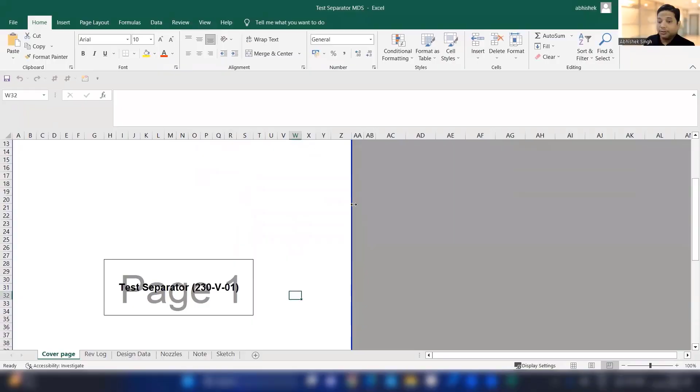So this is the cover page - logo of client, project number, document number, all this will be coming here. One will be logo of client, and consultant means your company. So your company and client. If before project starts we create a template for that project, so you don't need to be worried about creation of the template. Tag number, very, very important.

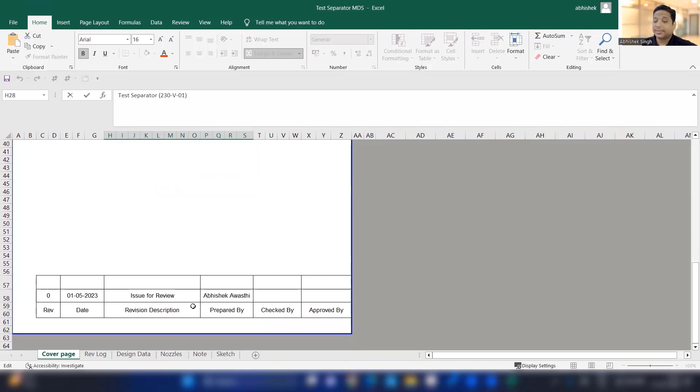With that, the equipment is identified in the P&ID. This is the description, prepared by, checked by, and approved by. No doubt in that.

We maintain the revision logs to make it easier to know what was changed in that revision, basically. If any things are on hold, we write it here so that people using it know that this is still on hold, not finalized. So we'll not take it as face value.

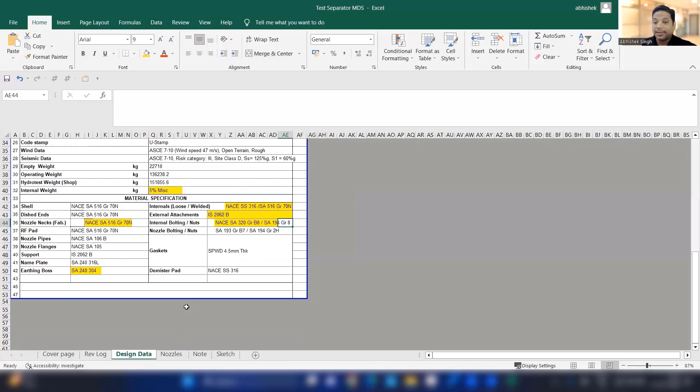Now this is the data from where actually your input starts. This data sheet is applicable for what? Whether it is getting prepared for inquiry, just to get that quotation, or it is for purchase.

If we are in a FEED stage, we may send it only for budgetary inquiry. If we are in detailing stage, we may send it for purchase. Before, they will send the quotation definitely, but if it is finalized stage, they will be using it as complete data.

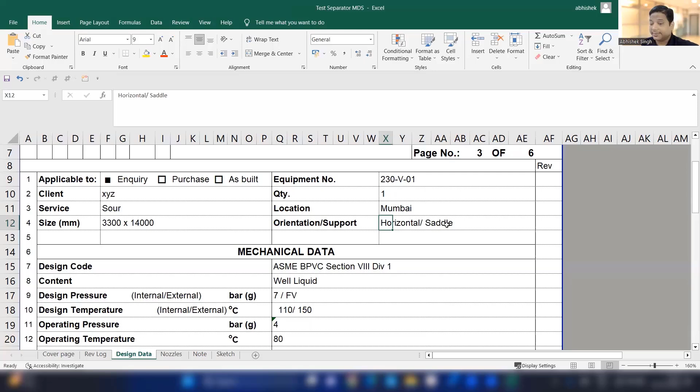Here you'll also get whether it is horizontal. If it's horizontal, then only one option - saddle. If it's vertical, then skirt and leg may be the options. ASME Section 8 Division 1.

These are all the inputs which is there in the process data sheet we have taken. Operating pressure is not that important for us, but anyway we have to fill that. Density - if 3 values are written, you have to also write all 3 by using stroke.

Capacity - we can get that capacity directly in PV Elite. Do you know how to get that capacity in meter cube in PV Elite? Let us say I open a test separator done by one of you.

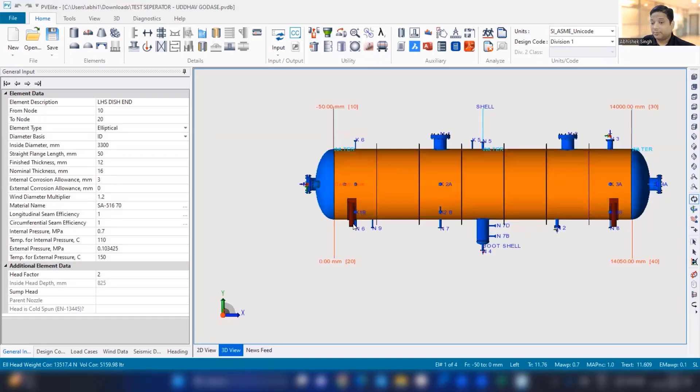Now this is the element for which I want that detail - let's take the dish end. You want to know the capacity of this dish end, so I'll go with this element properties. Can you see that? Element properties - here if you'll see...

all the items, left dish end - what is the corroded weight, what is the new weight? Volume - okay, that is the capacity. So corroded volume, new volume, and also the surface area which will be required for painting. Sometimes we have to give output for painting - what is the surface area? So instead of calculating, you can just get it directly from here.

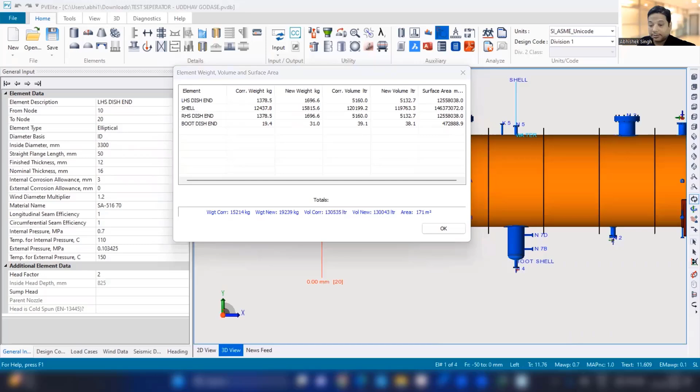So the volume, if you see, the new volume is 130,000 liters. So what will be that in meter cube? If it is 130,000, and 1 meter cube is 1,000 liter, right? So it will be 130. Now, let's check whether that is correct... 129, 130, okay, got it. So that is how we see the capacity.

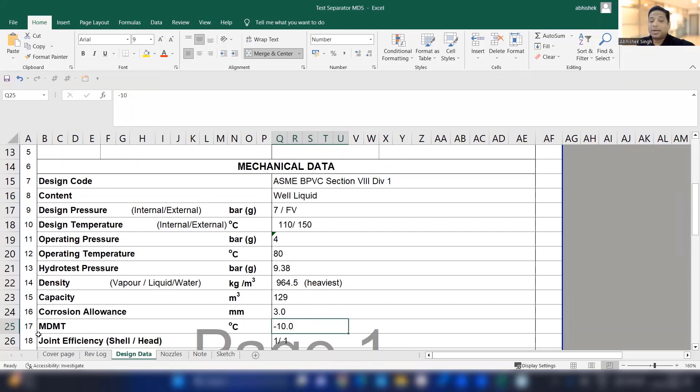So better to write it as a geometrical capacity, Abhishek. So you can change this. This may be the typical data sheet.

And if you want to write operational also, you can make it like - stroke. The other value also, if you want to write that, some capacity will be given by the process, so that will be kind of operational. So you just write stroke and write that also. Both you can write. Corrosion allowance, MDMT.

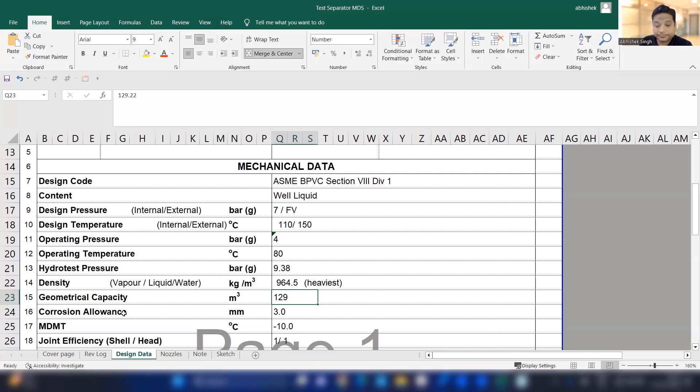MDMT also - there are two MDMTs. There is service MDMT and material MDMT. So which one you want to write, that you have to write - that's service or material.

Joint efficiency, radiography, shell and head, post-weld heat treatment, yes.

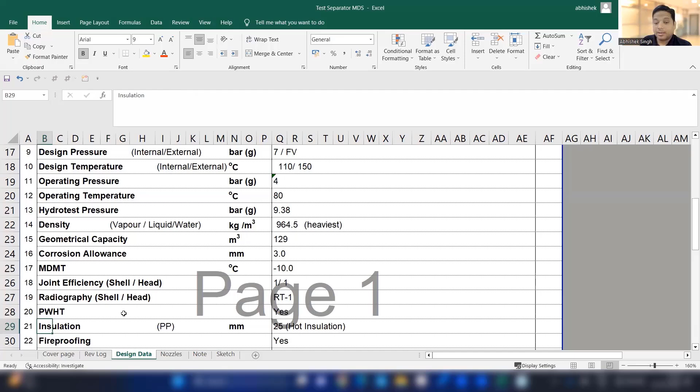Insulation, fireproofing - why this? What do you mean by fireproofing? See, if there is proximity of fire propagating from ground, we try to isolate the equipment from ground by doing this fireproofing. So what we do in that, the saddle we cover in fireproofing material. It's very similar to clay. So just imagine that there is a saddle, steel saddle. Now you have covered that completely from outside with clay. So if any fire comes, that will act as a barrier. It will not allow it to propagate to the vessel. Yeah, so that is the reason for fireproofing.

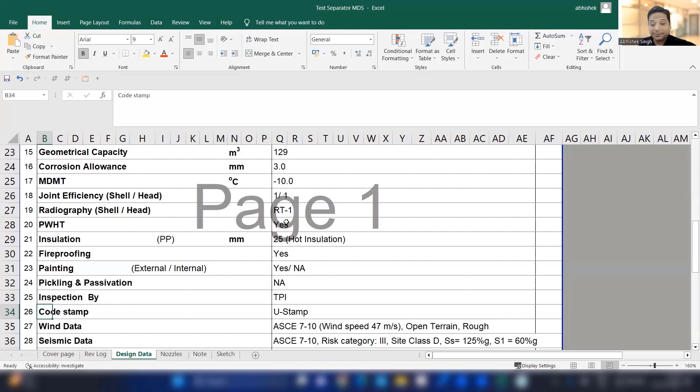Painting, external yes, internal not applicable. Pickling and passivation will only be required when it is stainless steel material. Inspection by TPI, third party inspector. Code stamp, if U-stamp is required, then we'll write U-stamp.

Wind and seismic data. Now here we have empty weight, operational weight, and hydrostatic weight. So 22 ton, 136 is operating, 151 is the hydro.

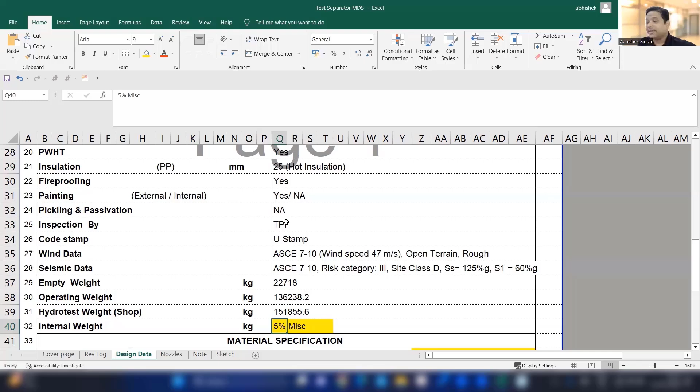Miscellaneous, internal. In the separator only wear plate is there, right? So for that, it's better to calculate weight, but you don't need to even mention it because it's a very, very small fraction. Internals, when we provide, when there is a big internal coming, typically that internal weight, the internal will be supplied by some internal vendor, because these internals are very specific many times. Not in this case, but in other cases, if there are internals available, they may be based on some technology, so that is typically provided by a vendor. So you may have to write 'by vendor,' and then once you get the drawing and weight from there, you update it. That is the typical process.

So shell material, NACE SA516 - we don't write it like that. You write SA516 grade 70, and then in bracket you write NACE. Typically that is how we write it, though you can write it however you want. You'll have to see what philosophy is being followed in your company so that it does not look different.

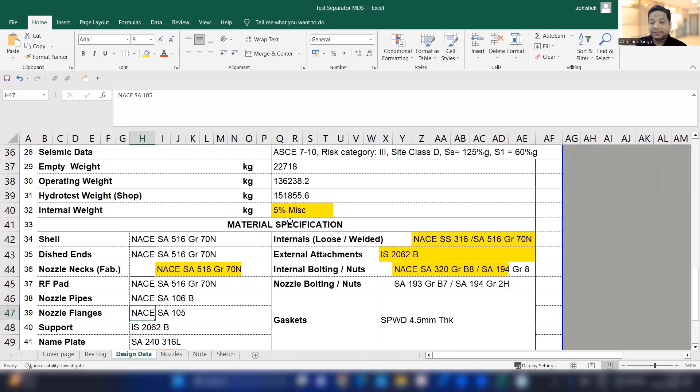Pipes 106. Nozzle necks fabricated 516. RF pad 516, 105. Flanges support 2062. Nameplate 316L.

Internals, if it's there, then you have to mention. If it is not - see, if it's a wear plate only, it will be carbon steel, it will not be SS. So you need to write only when you know the material. If you don't know, just write a dash, you don't need to fill it. Never fill data which you are not sure of. That is the one thing you have to do, because this becomes a guideline for the person who is referring - he may not be thinking much. So if you're not confident on any data, don't mention it. That is the best way, just write dash.

So whenever you have something like that - if internal bolting is not applicable, then why would you need to mention that material? It will just be dash. You don't have to mention anything.

So nozzle bolting. For if it is NACE, then typically - have you guys noticed in the specification something was given for material? Nozzle, yes, M. So instead of B7, it will be B7M, which will be applicable. 194 grade 2H. Anything related to the nut, whether any different material was there or the same thing - you'll have to see the specification, just check that and tell me what is the value given for that.

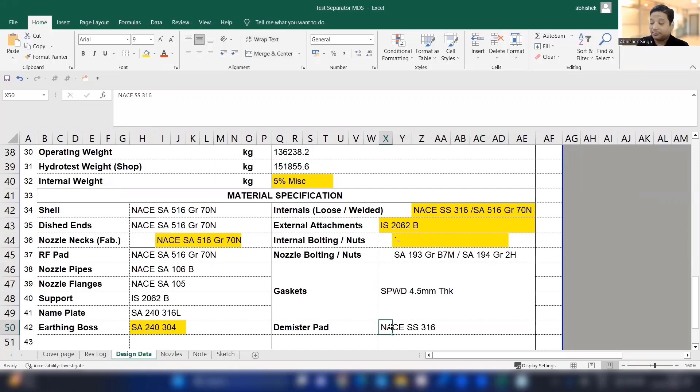So gasket, spiral wound gasket, 4.5 thick. If there is inner and outer ring, you have to mention that, what is the material of the inner and outer ring - that also you have to mention. Demister pad, if it's there, then only you have to write it; if not there, then don't need to write. But I think in the nozzle, it was outlet nozzle, it is there, 2HM, right? So here also M is applicable. So you have to be careful with that.

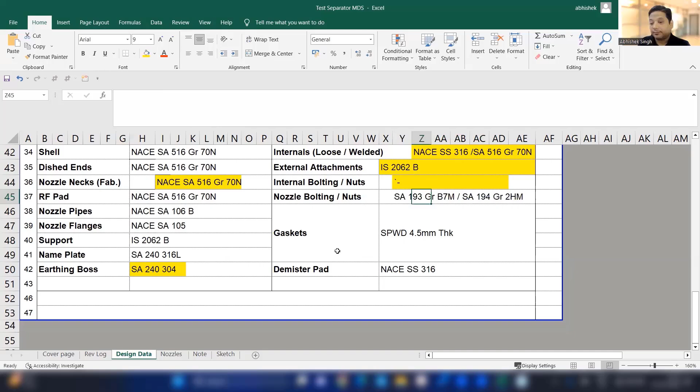Great, now we'll go to nozzles, we'll see briefly. N1 nozzle, 14-inch, schedule 60, thickness, flange rating, WNRF, and then whatever pad width and thickness. Try to keep this width in a rounded value - 711.2 does not make any sense for fabrication, so just write it as 712 or 715. And that is the width.

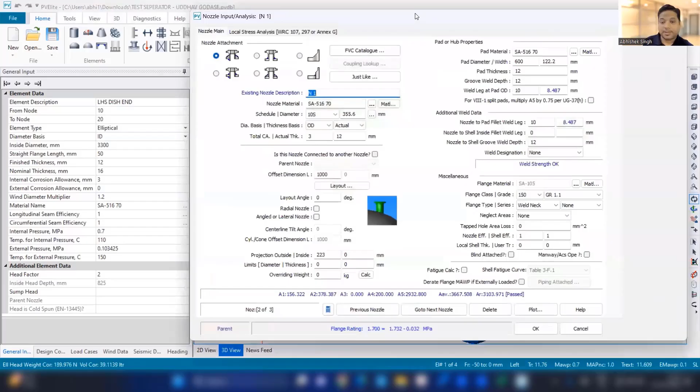So now, if it is 14-inch and you want to make it from plate, then what you'll be doing? For schedule, you will write none. Here you can write the dimension of ID. Typically, once you are making a cylinder, we prefer ID, so ID we will write, and then here also, let us say I don't know what is the value, but let us write if it's 355.

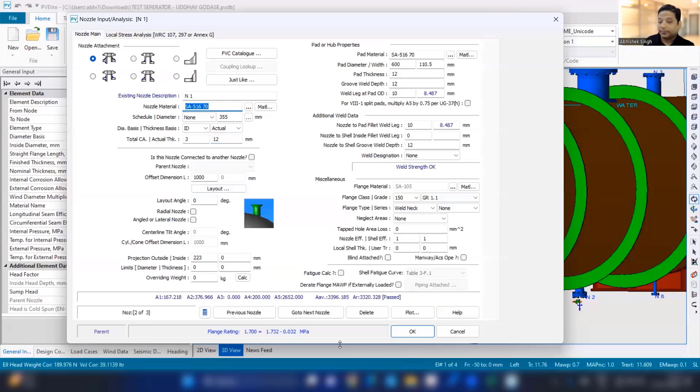Okay, now here also we'll write ID, and here actual thickness, whatever thickness you are providing, that you write. So that will become a plate now. Material also SA 516-70. So it is plate. That is how we do it.

With RF pad of nozzle, if nozzle is passing with lower pad width than 2D, can we qualify? Before that, see, OD 2 times diameter is the maximum limit. Now, if you remember, apart from the pad, there are lots of other thicknesses participating and contributing towards the reinforcement. So in that case, we may be able to qualify with less width. So whatever you are qualifying, that you have to write. You don't have to go with maximum W, you have to find the minimum W.

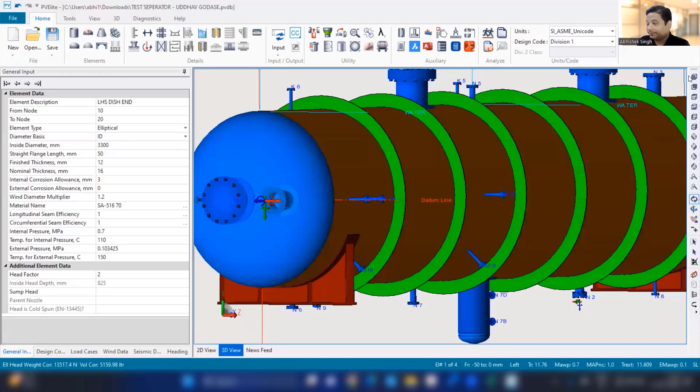Whatever you are qualifying, by using PV Elite, same width you should reflect there. Now, so mentioned width here, if you are making it from plate size, if you're writing 14-inch, then thickness, just write 12 thick or 14 thick like that.

Projection, why you have kept it at hold? Any reason for keeping? Typically, if nothing has been given to us as projection, we can follow the EIL standard. With that, we can maintain whatever projection is required. So mention that if anybody has to change it, then they can request. So based on your understanding, it should be there. Okay, all other things I know you guys will be able to put, so nothing much there.

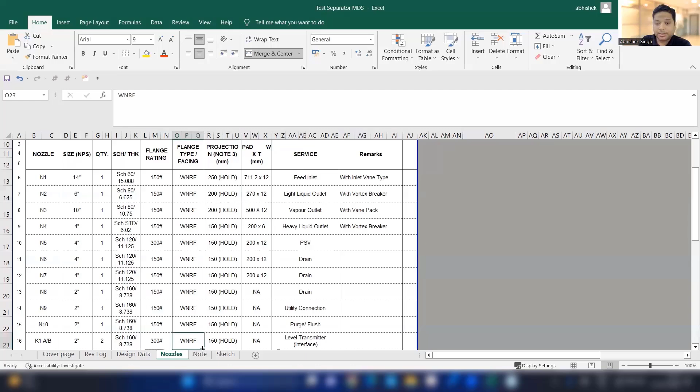Notes, you have to be very, very careful. This is the ignored part typically, but it's very, very much important. Painting shall be done as per project painting specification. If I'm writing that and giving to vendor, I need to give painting specification also.

CG - this will come when you are giving this to the vendor to make GA drawing. So we are telling them to mark CG for empty and operating condition. If you are the vendor itself, you are the manufacturer, then don't write this. So always go through these standard notes - you may have to add some notes, you may have to delete some notes.

So lifting lug shall be provided on the vessel - this only you write when you want the vendor to do it. If you have designed it and you want him to make that lifting lug as per that, you have to give the dimensions, and this note will not come.

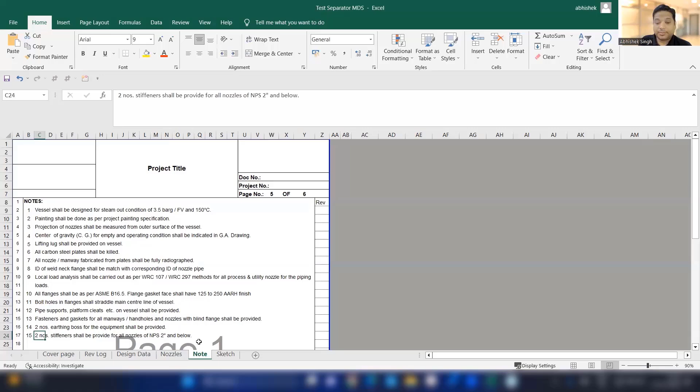Typically, I have just told you to post this PV Elite, but this is when you're actually making a data sheet, you will have to make a sketch in AutoCAD and post it here. That sketch will be there, which will indicate the thicknesses. See, complete information for fabrication should be there.

If the saddle part also you've completely designed and just want him to follow that, then you can always mention the dimensions here. So once you are mentioning the dimension, that part will become input for the further activity, so he'll make as per that. Okay, so hope this data sheet part is clear to all of you. How we fill it?

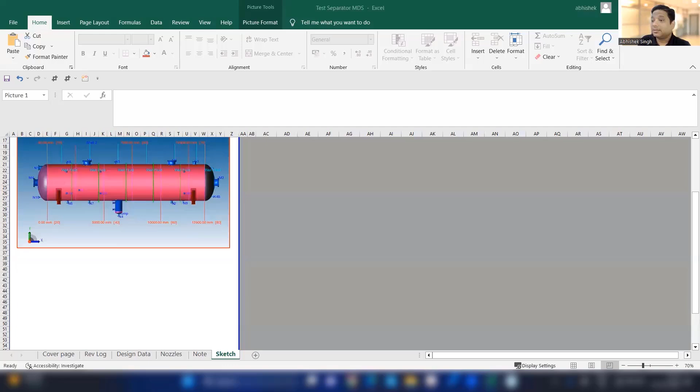Okay, go one by one column and fill each and every data. If you are not sure of any data, don't fill it. Don't fill it unless you are sure, because then that is where the biggest mistake comes from. And once you are asked, you cannot say that this was there already, or I have taken it from data sheets, process data sheets.

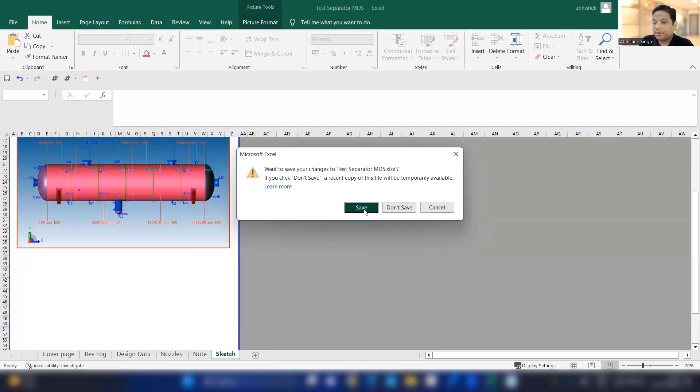Whatever question you want to ask during preparation of this document, ask it then. Once you have submitted, you are the person who made it. You're responsible for each and every data which is there inside this document. Getting it? So you have to justify now - you won't be able to ask questions, they will ask questions, you have to answer. So whatever you have to ask, ask before giving this. During the preparation of this, whatever question you want to ask, not after submitting - that is the sign of a good engineer.